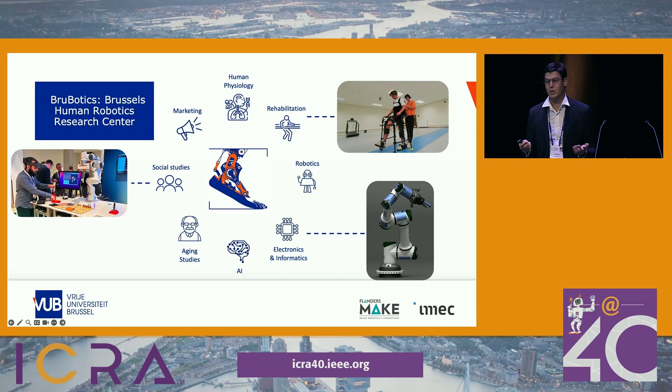And in order to realize this vision, we need a multidisciplinary approach, because a robot is an integration of the best technologies. That's why we work together with the AI lab, the materials research group, the electronics group, IMEC, and so on. But since we do a lot of human-robot collaboration, also the human, social, and medical sciences are very important, and all of this forms BruBotics. And we want to create real impact by collaborating with a lot of companies, but during this presentation, I want to present our different startup initiatives.

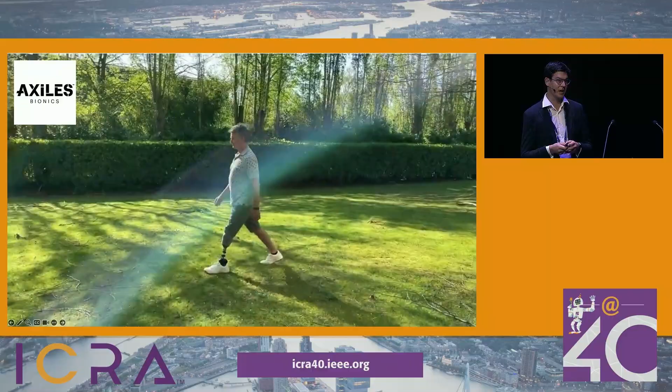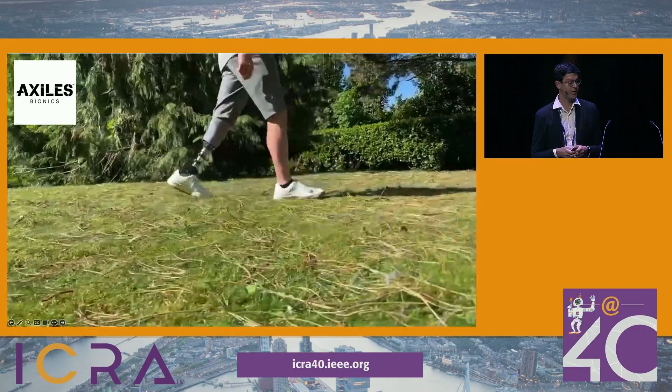And the first startup we created is called Axiles Bionics. It was one of the papers on 30 years of actuation technologies in our group, mostly on compliant actuators, on locking devices, and so on. And this IP is transferred to the company, and they have now their first medical certified product. We're also having IP on the knee-ankle system, and next month we will present this in Cybathlon in Zurich.

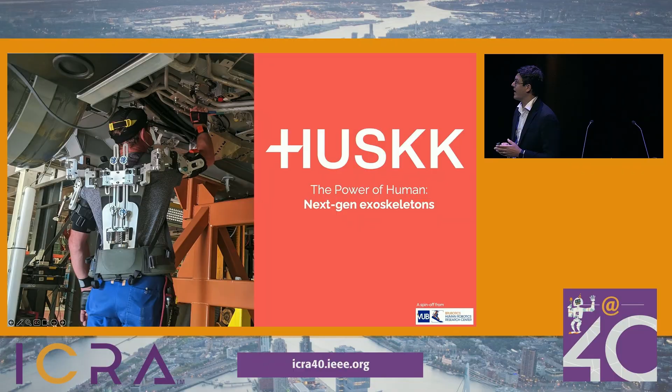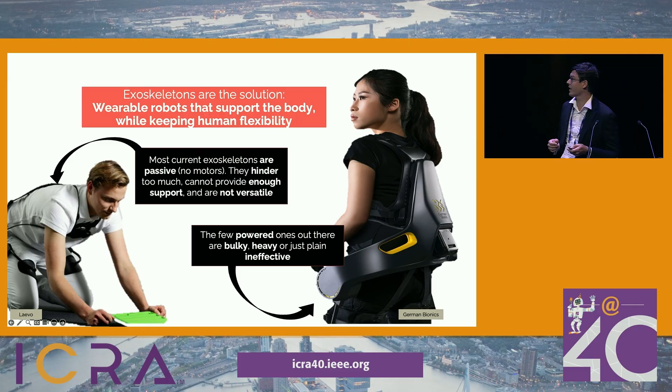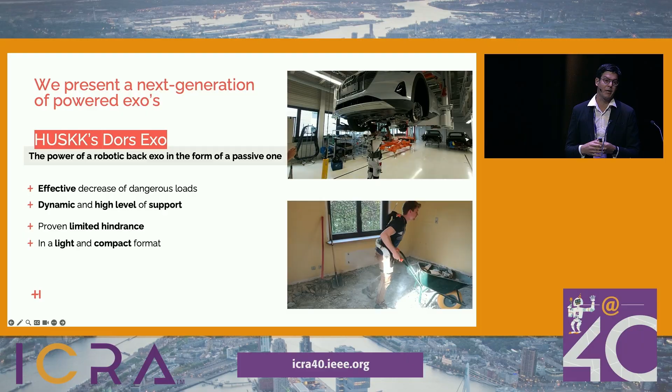So apart from prostheses, we're also developing exoskeletons, and on the market you mainly find passive exoskeletons, but the problem is that they often don't support enough and hinder motion in the other motions. Then the number of powered exoskeletons, with motors, is only very limited, and they're often very heavy and bulky. And so similar as with our prosthesis, we want to combine the best of the two worlds, taking passive elements but also active motors. And so now we're developing our next minimal viable product in order to go to investors, to raise money for our startup company, which will be called HUSKK.

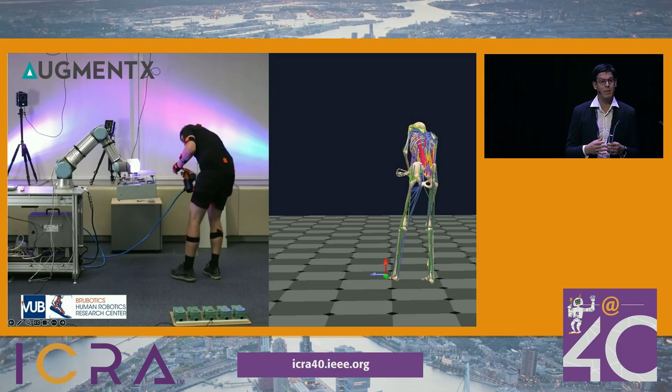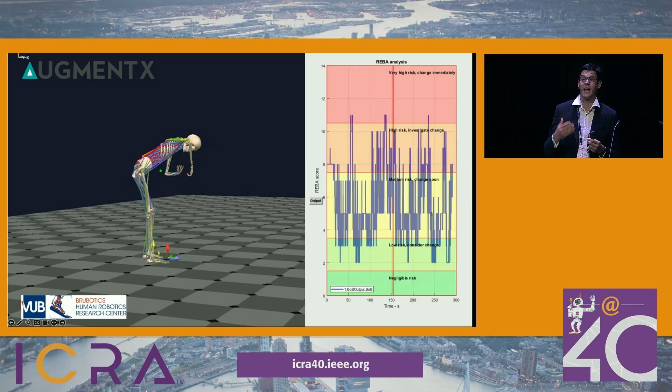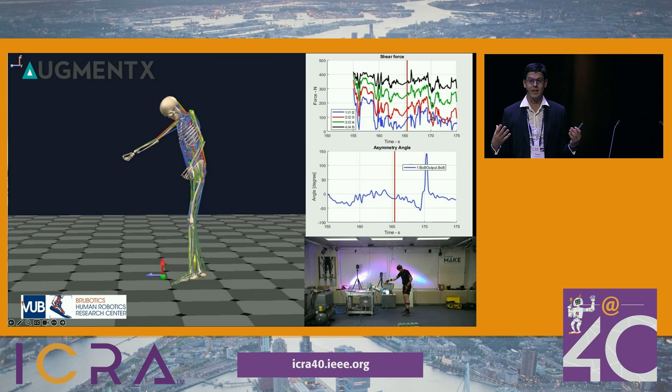In order to do that, we need infrastructure, and that's why we have a €1 million lab called AugmentX, where we have both fixed equipment, like a lot of Vicon cameras, force plates, and so on, but also equipment which is wearable, like IMUs and insoles, so we can measure the ergonomics in situ in a certain factory and then reproduce it in our lab to see the impact of exoskeletons, but also cobots and so on, on the human body. And this lab is also available for other researchers and companies, and we have a mirror lab on rehabilitation robotics on our medical campus.

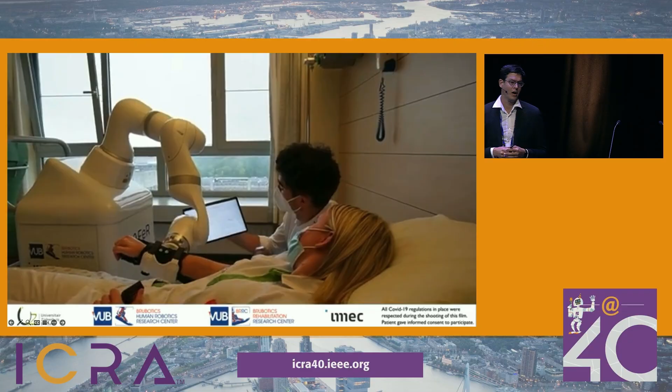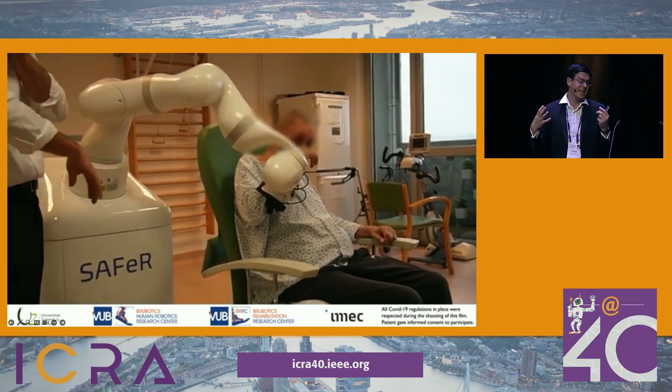In order to control exoskeletons, we need the intention to move, because only measuring positions is not sufficient. If I want to lift a heavy table, I will not move anyway. So that's why we need to go to the intention to move, and that comes from our brain, but that's very difficult to measure. And that's why we developed sensorized cuffs, which have EMG sensors, which are noisy but an early signal. So we complement that with force pressure sensors, which come later.

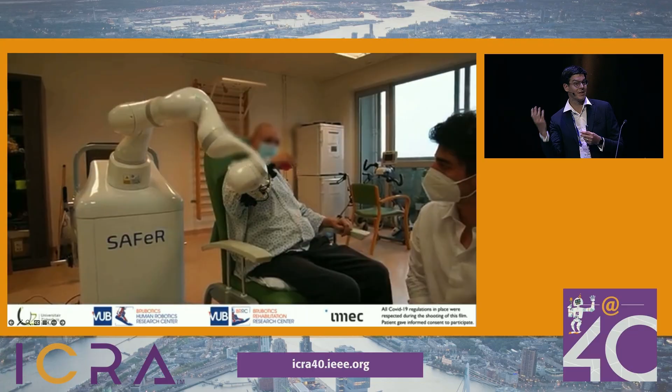And thanks to the KUKA Innovation Award, where we were finalists, we got a medical certified cobot, and we made a rehabilitation device. So therapists could very easily program new behaviors, and when there was an intention to move, we could assist the human. So we also wanted a company on this topic, but the problem was that the robots are very expensive. Moreover, we need to certify again as a medical product, which is a long time to market. And also the reimbursement of physiotherapists, at least in Belgium, is very challenging when using robot technology.

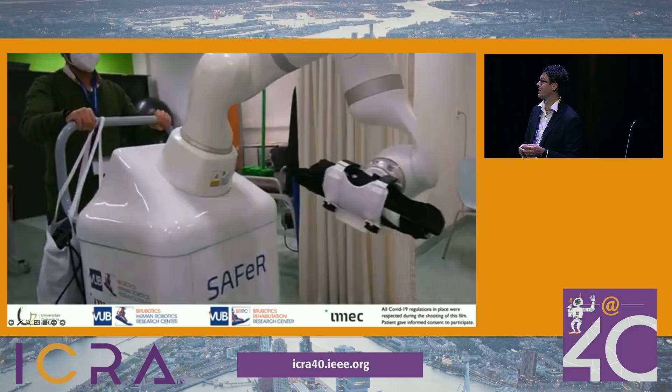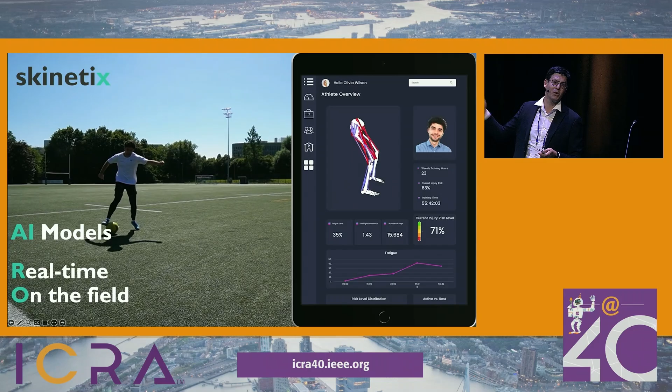So for this spin-off, which is called Skinetix, we went away from robotics. I hope they will come back at a certain moment. But we go to sports injury detection. So there is a sensorized sport garment, and the idea is that elite athletes will get from the field to their medical team information about the possibility of sports injuries.

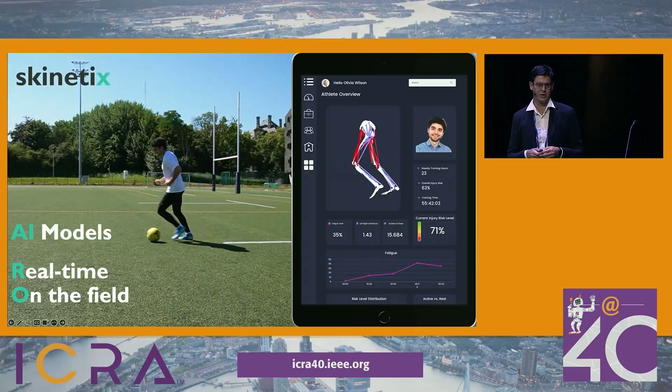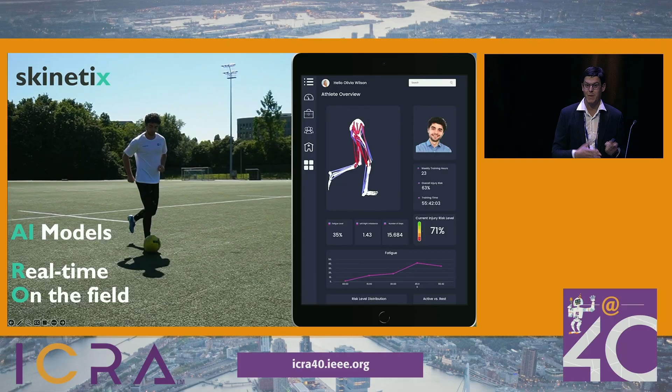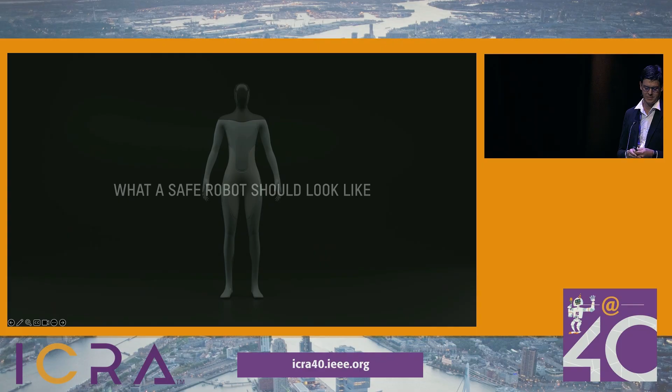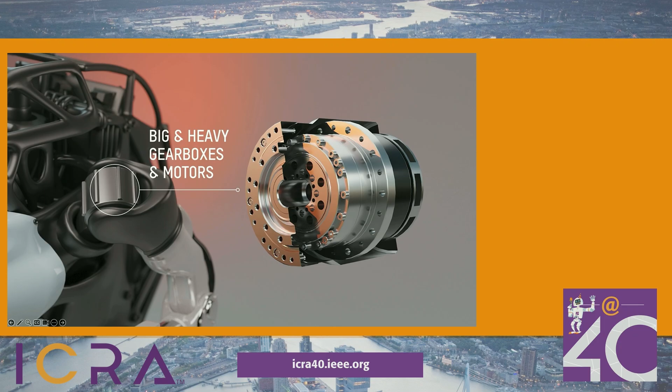This is what a truly useful and safe to interact with robot should look like. And this is the pinnacle of what robotics engineers can build today. What's the problem? Today's robots require big and heavy gearboxes and motors to move around. This is known as the hardware problem of modern robotics. How can we make motors smaller? One way is to put more teeth in the gearbox to increase its gear ratio. However, this makes the gearbox clunkier. On the flip side, if we try to shrink the gearbox instead, we just end up with a huge and heavy motor again.

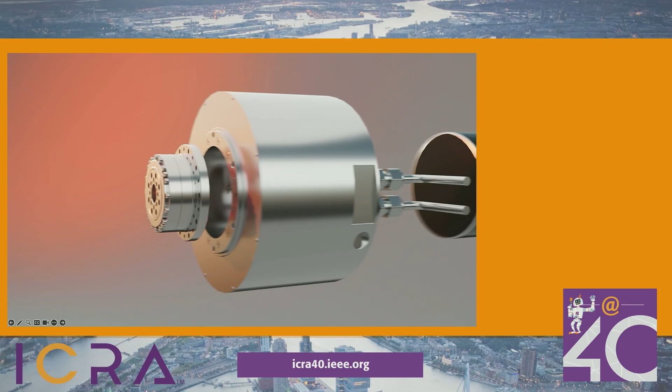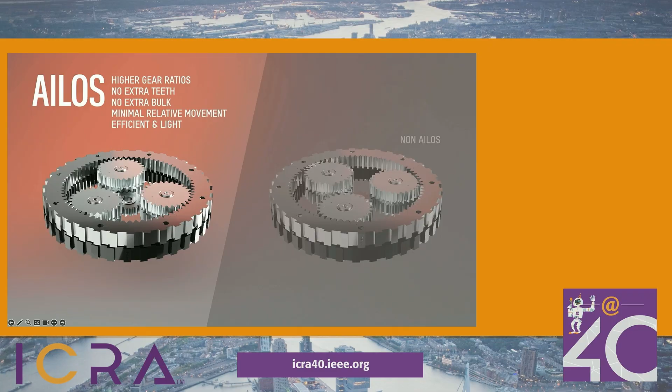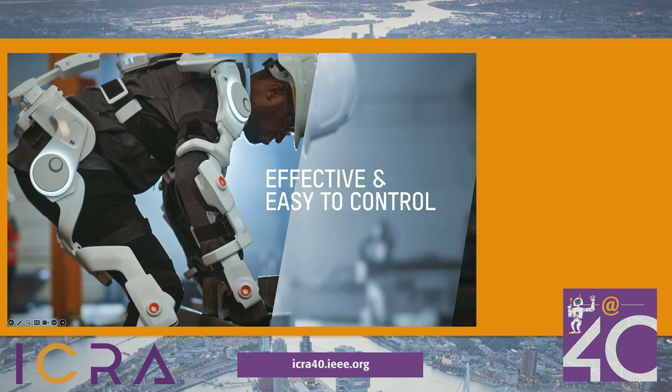At AILOS, we've re-engineered a gearbox with a uniquely efficient planetary movement. Thanks to its novel topology, our gearbox produces higher gear ratios without any need for extra teeth or extra bulk. Our patented technology also minimizes relative movements inside the gearbox, making it more efficient and even lighter. The AILOS gearbox cuts the weight of the motor gearbox duo by 30%, ultimately making the robot up to 50% lighter. The result is an effective and easy-to-control robot that's eco-friendly and truly beneficial. AILOS, shifting robotics into higher gear.

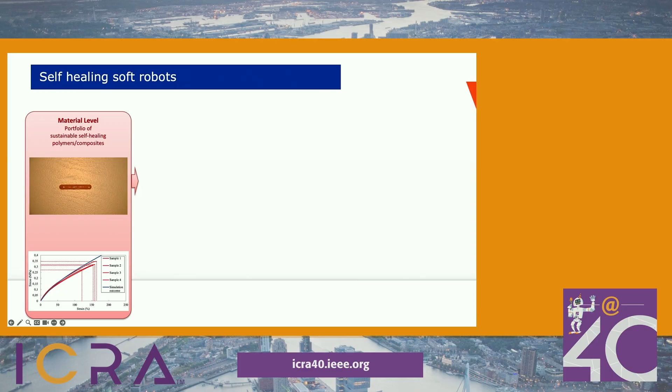Moreover, we're also looking into new materials. The reason is that robots are very complex, and when they're damaged, we need costly repairs, or we throw them away. And so that's why we're developing, with 20 researchers at the moment, self-healing materials. So you see, we cut the material, we bring it back together, and the network polymer reforms.

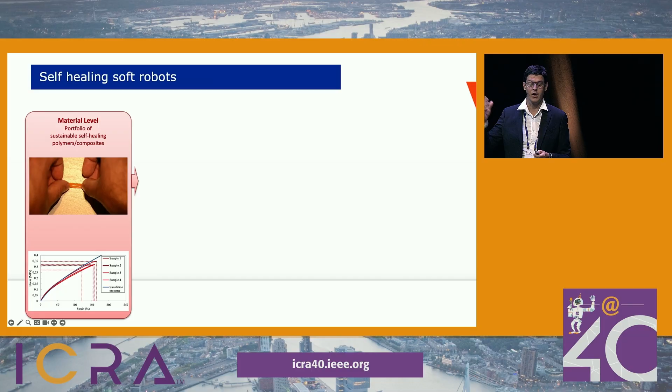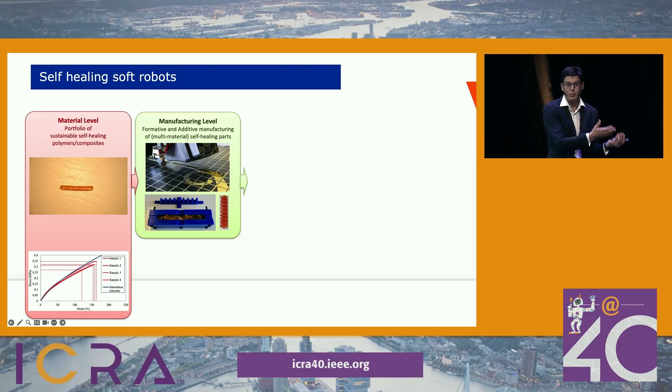Moreover, we can make it in a portfolio of different mechanical properties, so from very elastic to stiff, but also conductive and magnetic properties. We investigated the different processing techniques, and this is very interesting because we can both mold the system, the material, but also 3D print it. And typically, a networked polymer cannot be printed. You cannot print rubber, for example.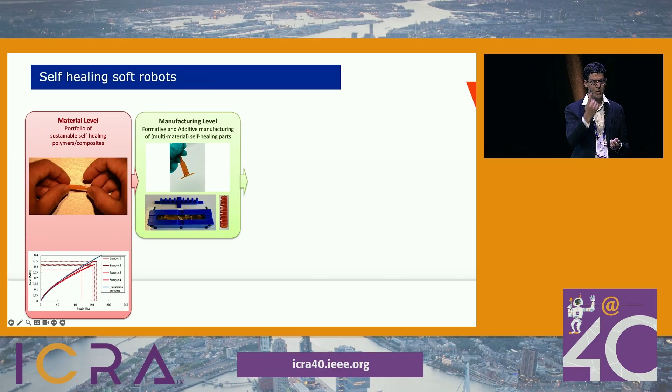And what is very interesting when we do filament printing, then you have the different layers. We have a reaction taking place after depositing the material. So that means the different layers heal together. So we have isotropy in our material, which we think is also a very big potential market for this material.

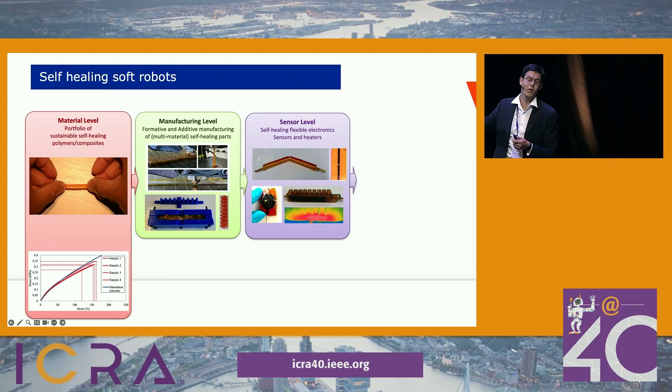Moreover, we can make the material conductive. That means we can embed sensors in it, for example, for touch detection, but we also use it for measuring pain, measuring damage, but also as a healing network, because we can have both autonomous healing, so after damage it autonomously heals, but if, for example, your gripper is dirty, you want to control when the healing takes place, and that's why we have also non-autonomous healing materials which need heat, and so we can send a current through the conductive material, it heats up, and as such, the actuator can go back to work.

And so we developed several demonstrators with it, also multi-material, because how do you combine with traditional plastics, for example, different materials? You glue them, you screw them, but then you also have there the weak interfaces. Here we have covalent bonds between the different materials, so the interface is perfect. And there you saw a video where we damaged the pneumatic finger, and it takes some seconds before we can restore and take the actuator back into action.

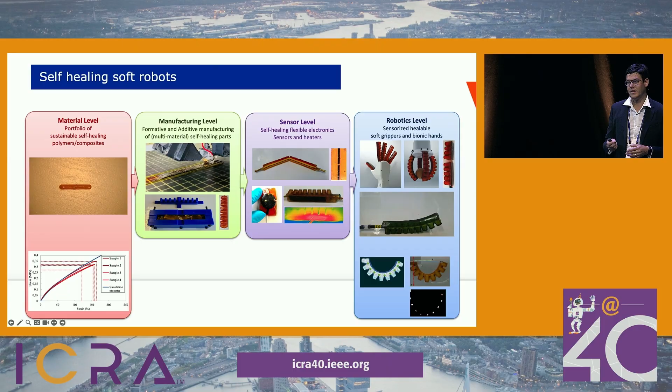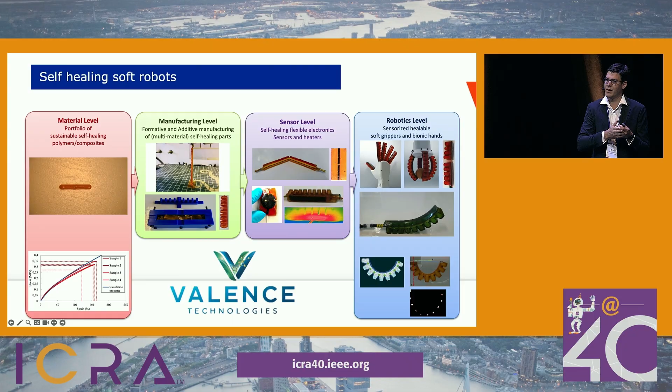And this is protected with 7 patent applications, and we're currently developing Valence Technologies in order to go to the market with these materials, which is a vertical platform technology, so we can use it in a lot of vertical markets. And sustainability is on different aspects, because when damaged, we can heal.

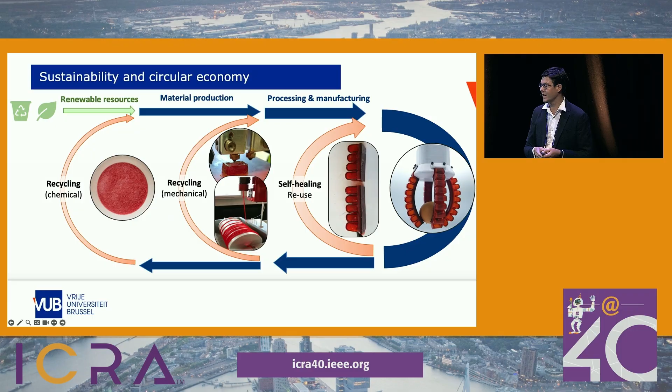We can also mechanically recycle it, so we can print the material again, impossible with other network polymers. But we can also chemically recycle it, meaning we can go back to the original monomers and give different mechanical properties to the material. We're using biosources like castor oils instead of fossil oils, and also investigating biodegradation.

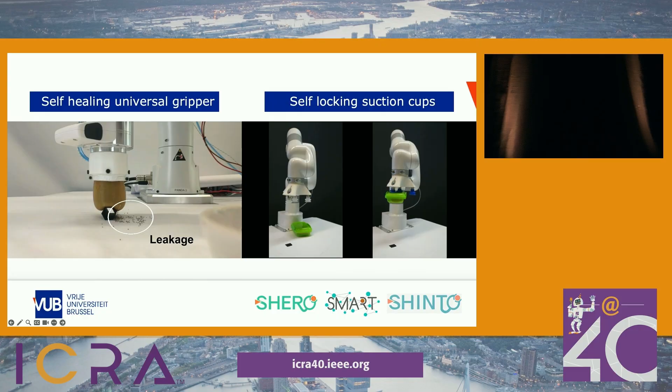So we can make, for example, universal grippers, and here we exaggerated to take a cactus. It will get damaged, we apply heat, the material repairs, and we can go back into action.

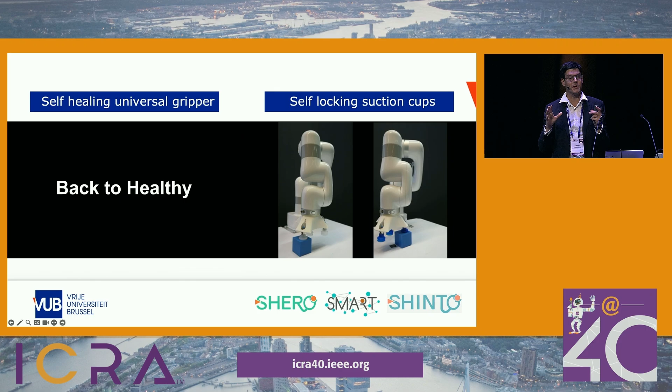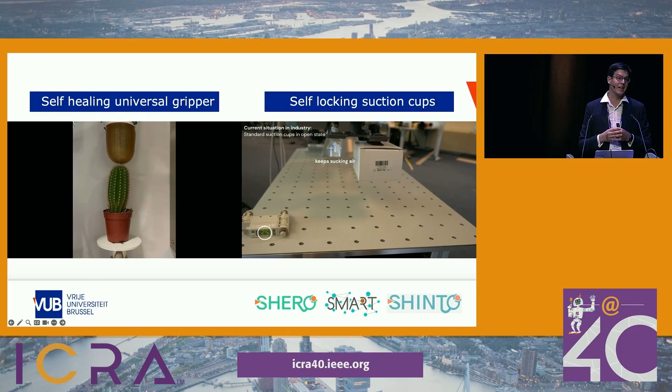We also developed self-locking suction cups, very often used in industry. And so typically, if you have a big array of suction cups and want to take a smaller box, then you cannot create enough vacuum to lift it up, like it's happening in the video. But our suction cup, in the design and the materials, automatically closes, so it consumes much less energy.

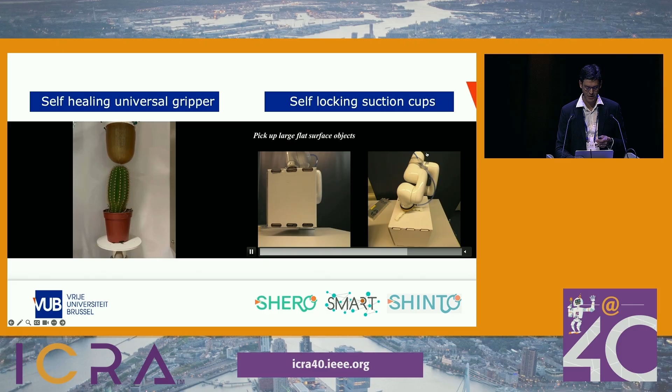That also means we can pick up parts with holes in them, which is often a challenge in industry. And also, we can make it more an octopus-style robot. And again, we use self-healing materials, so also the suction cups can be repaired.

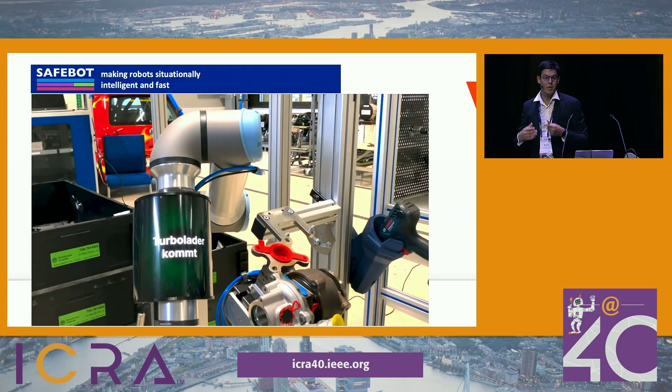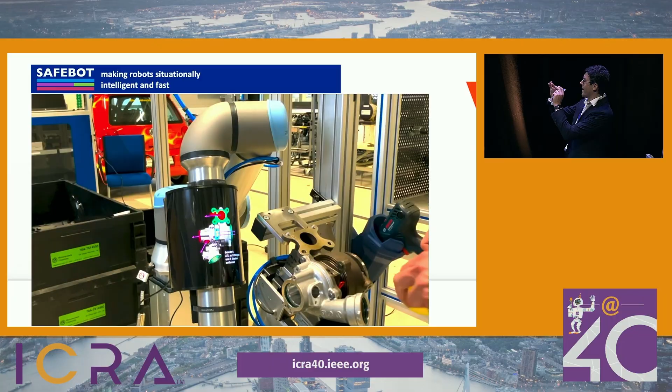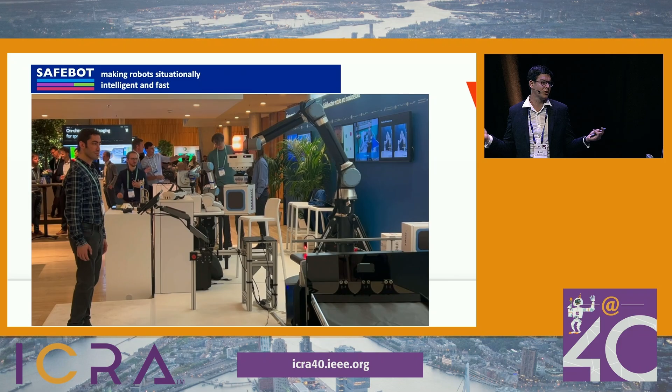The last spin-off we're preparing will take a bit more time. Here in the SOPHIA project with Arash, we had to lift heavy parts at Volkswagen, so we used the cobot. We had a flexible screen to inform the user, but although the application was very interesting, they couldn't go to the real implementation in the factory, like 2/3 of the other developments, because cobots are just too slow. And so that's happening a lot at Volkswagen, for example, that they cannot implement it.

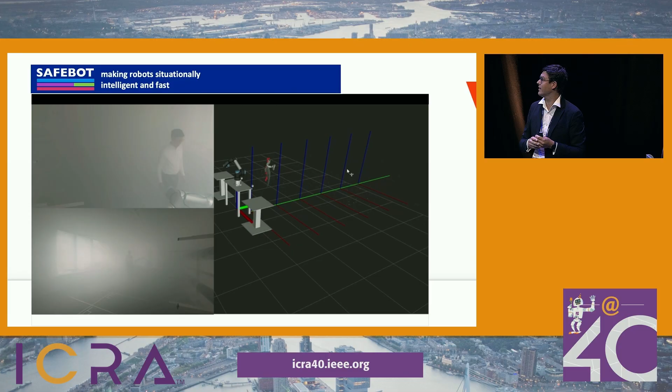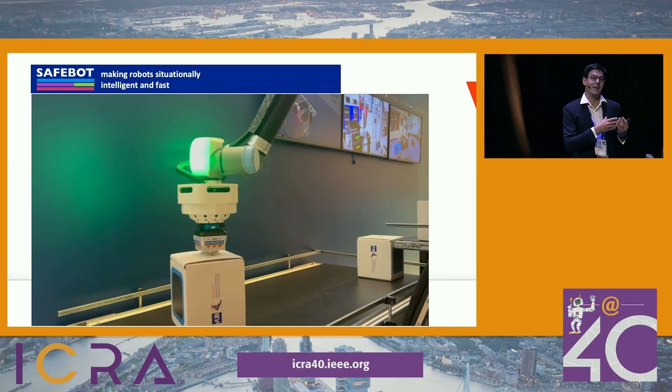So what we developed is a perceptor ring with different sensor modalities, so we can make an occupancy map, which is also immune to different environmental conditions, like we filled the lab here full of smoke, and we could still see obstacles and humans. And that means we can move the robot arm fast, and when, for example, a human is detected, it will slow down and stop, and then rework its path.

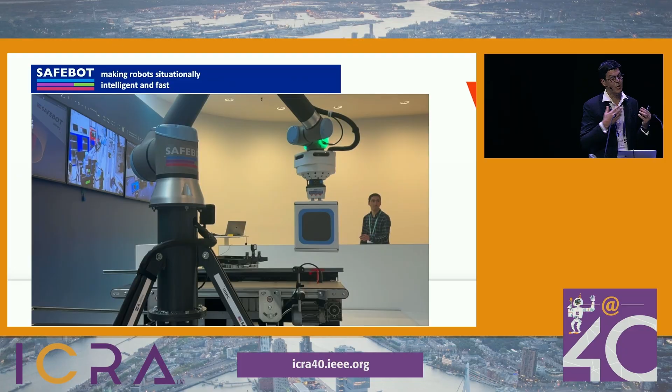But that's why we are also interested, and the talk yesterday was also very interesting, in how we can replan, to bridge the difference between industrial robots, which are very fast and productive, and cobots, which are slow, but are very safe.

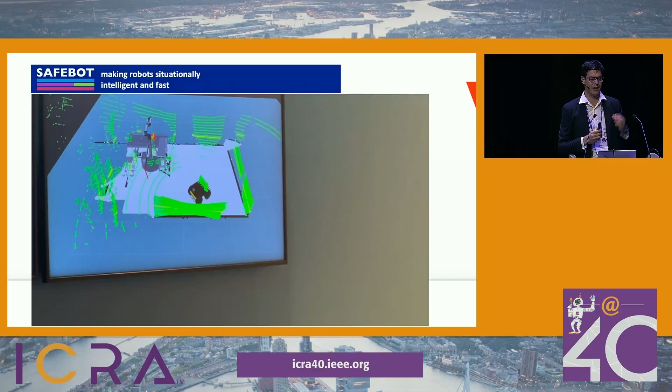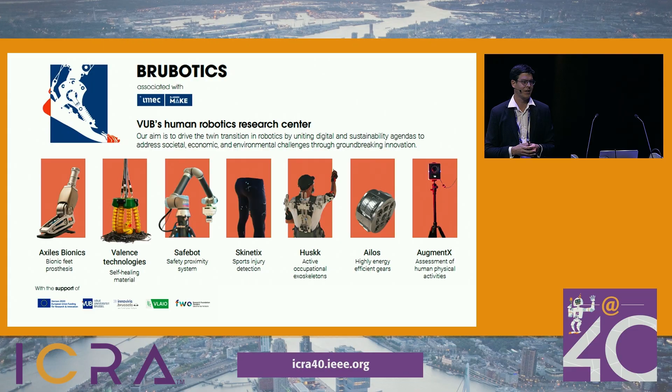Thanks very much, Bram. Any questions from the audience? I don't see any questions right now.